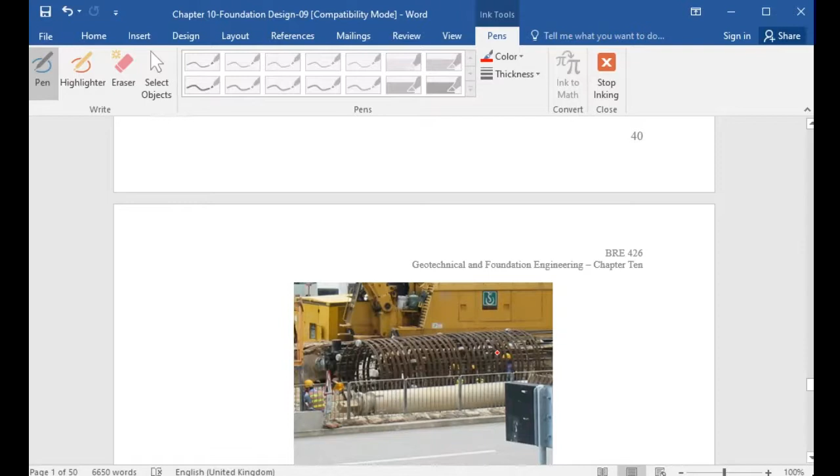With that, during the concrete placement, the steel pipe or the temporary casing will be extracted slowly until the whole steel casing is removed, and then the hole will be completely filled with the concrete, the reinforced concrete. So that is the bore pile construction using the temporary casing.

But what about the other technique? The slurry trench method, the slurry support method. Well, in the slurry trench, we will use the grabber or the clamshell.

We have this - there should be a... this, you can use this method, right? The clamshell.

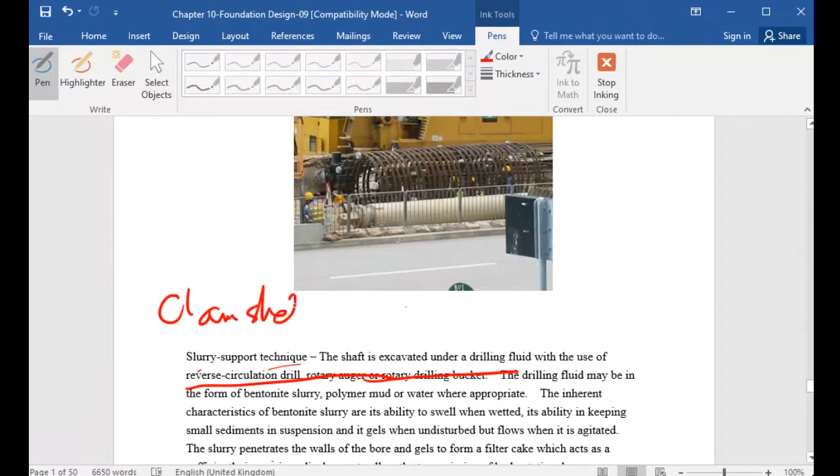Okay, the clamshell, which is in fact a very heavy machine, like the crab, the seafood, like the crab. This clamshell will open the jaws, grab the soil, and then by raising the clamshell, you have the soil excavated from the bottom of the hole.

Now, in the meantime, during the excavation, you have to use the drilling mud, sometimes called the bentonite. Bentonite. Now, the bentonite will be a slurry.

A specific soil material, which will give you what we call the thixotropic properties. In other words, if the fluid is allowed to stay a while, there will be a setting of this fluid, becoming a solid. And when being agitated, it behaves like a liquid.

So that will give you a very good support - support to the trench during excavation, support to the wall, so the wall will become stable. And the bentonite will use the fluid pressure to support against the penetration of groundwater.

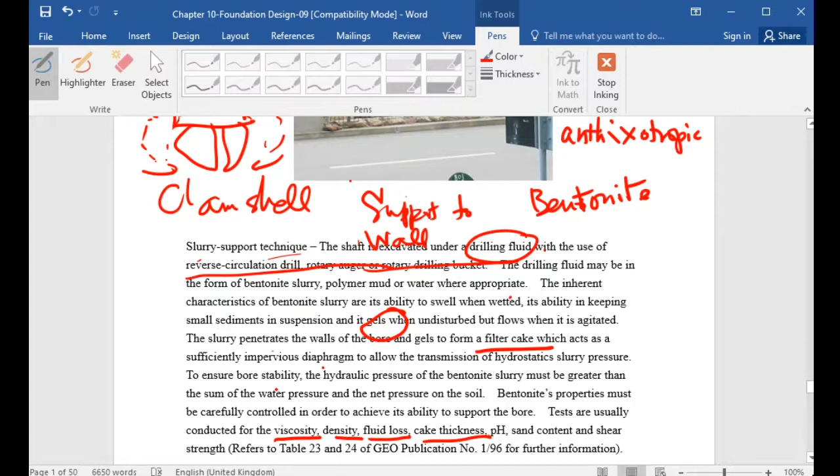Okay, now at the base of the bore pile, sometimes we want an enlargement. What's an enlargement? The bell-out, sometimes called bell-out, just like a bell.

Sitting on the table, there's a bell-out structure. Now the increased base area will give you the higher bearing capacity, because you have the larger base area rather than just the diameter of the bore pile. So you have to make the

enlarged base, so that you have larger base area to reduce the bearing pressure on the rocks - that's the bearing pressure - so that you have a higher rock bearing capacity because of this increased or enlarged base area.

Now sometimes it's called underreaming. Underreaming. So you can see it here - you can see the teeth here, the teeth. Now when the hole is reached down there, this will be extended out, this teeth - this length of teeth will be extended.

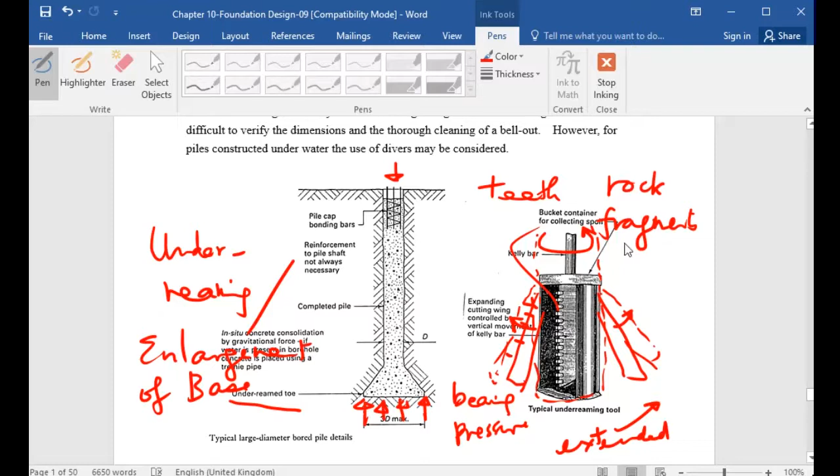Now you have so many rock fragments. Because of this enlargement, you have rotating your device against the hard rock, so that it will be broken into smaller pieces, the fragments. After that, you have come up with this shape.

Now, before the concreting, or lowering of your reinforcement cage, you have to make sure the base here must be very clean and clear from any debris. There should be no black debris, no smaller parts or fragments there. So you have to clean by what?

RCD, right? Reverse circulation drill plus what? Airlifting. When there is the RCD device installed, there will be a pipe, and the compressed air will be released at the base of that pipe, so that the compressed air bubbles will go up to the surface.

All this air bubble will rise up together with the debris, so that it's pumped out, and you got a sedimentation tank where all these rock fragments will settle down. So when you continue the airlifting until the surface, it gives you a very clean surface there. By inspecting the quality of the water sample extracted, the first sample will give you a lot of fragments. After several hours of airlifting, you should come to see clear water, free from any debris. That means the whole base has been cleaned with this airlifting operation.

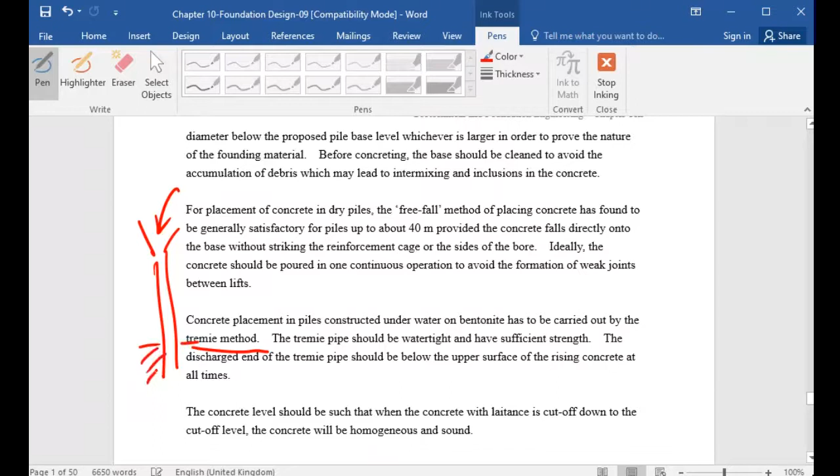And the concrete placement will be carried out by the tremie method. You know what's tremie, right? You use a down pipe, you place the concrete into it until the concrete is going down, and then it comes out from the bottom of the tremie pipe, so that you have to maintain a minimum embedment.

Embedment, in other words, you have to make sure the concrete outside the tremie pipe will have a certain depth of penetration. So the concrete will flow out from the bottom of the tremie pipe, and you have maintained this minimum depth of embedment.

Now, this will give you the newly placed concrete to push the previous pour upwards, so that when you continue the concreting, the concrete surface level will rise up until it totally displaces all the bentonite from the hole, and now we are left with the very wet concrete mix.

Now, in the tremie concreting method, you don't need any vibration or compaction, because the concrete will have very good flowing properties. This kind of concrete is sometimes called self-compacting concrete. In other words, by its own weight, the concrete could be compacted very well.

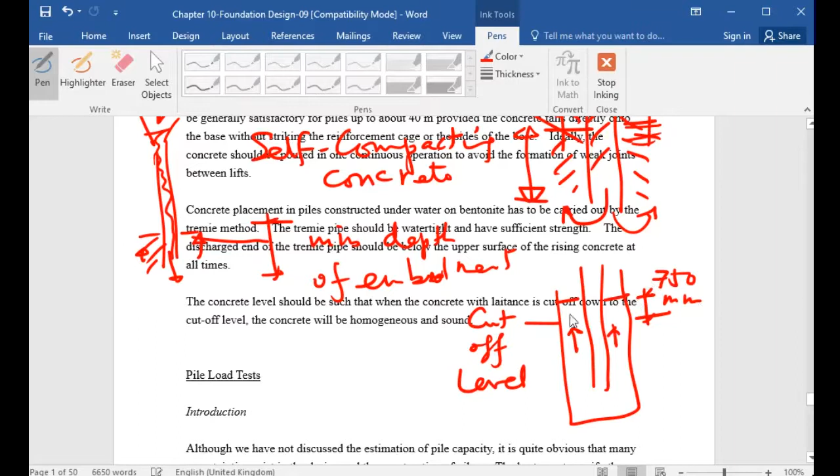Now you allow an additional 750 millimeters of concrete coming up to this level, and then you remove that part, because this concrete is usually contaminated with bentonite. So that's why we have to remove this additional 750 millimeter concrete.

So remember that you should pour your concrete a further 750 millimeters above the cut-off level, and this poor quality concrete has to be removed, should be hacked off. So until you come to this cut-off level, that should be giving you a very good quality concrete, but not for this 750.

So any question about the slurry supported bore pile construction? I think you have come across this knowledge in your construction technology or material course, some sort like that. Is it true? You have learned about it before, right?

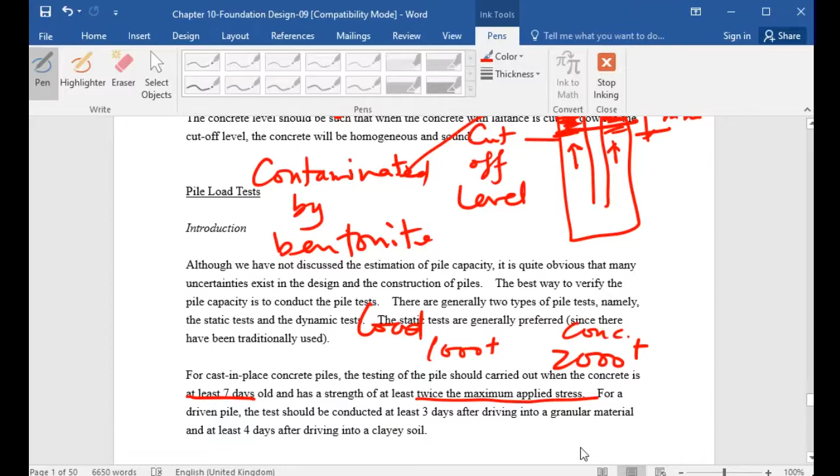Now for clayey soil, say for the friction pile, when the pile has been driven, you have to wait at least 4 days so that the settlement of the driven pile becomes stable, because if the pile is still moving, you should not apply the loading test. This is particularly important for clay soil because the settlement takes time, so you have to allow at least 4 days for the settlement to become finalized.

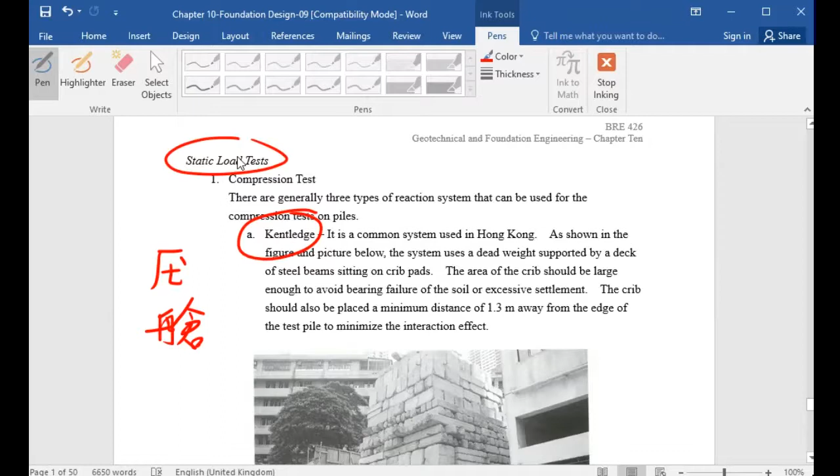Now, usually we do what we call the kentledge. This means a heavy weight - you are piling up things, like concrete blocks, so it becomes a huge load sitting on top of the pile. So it's a static test, a static load test, a dead load test. As you can see from this photo, you can imagine that's a kentledge.

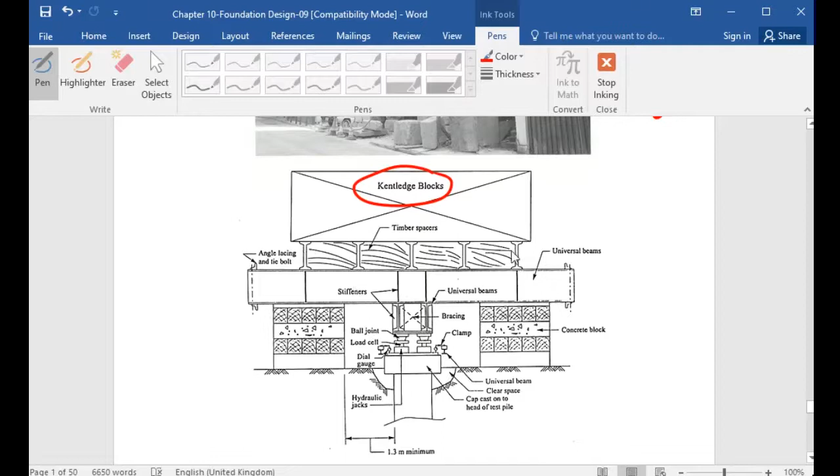A pile, a stacking of things, of concrete blocks. Now you can see the arrangement here. Here is the kentledge blocks, so that is the heavy weight, and then you have the steel I-beam.

So you have the steel beams perpendicular to this page, and in the 90-degree direction you have this horizontal layer. So you have a grillage of I-beams here, and here is the horizontal one. Both are horizontal, but in orthogonal direction - they are perpendicular to each other.

Now the horizontal one will eventually support the kentledge load through these 5 steel I-beams, and this loading will be carried by these rows of horizontal beams. Now, these 2 I-beams will apply the loading to this pile.

Now we measure the load cell. The load cell means a hydraulic jack - when you increase the oil pressure, it will move up. When you are increasing the hydraulic oil pressure, you have a greater vertical load, because it's going to try to move upwards, so it will support the kentledge, the upper concrete blocks.

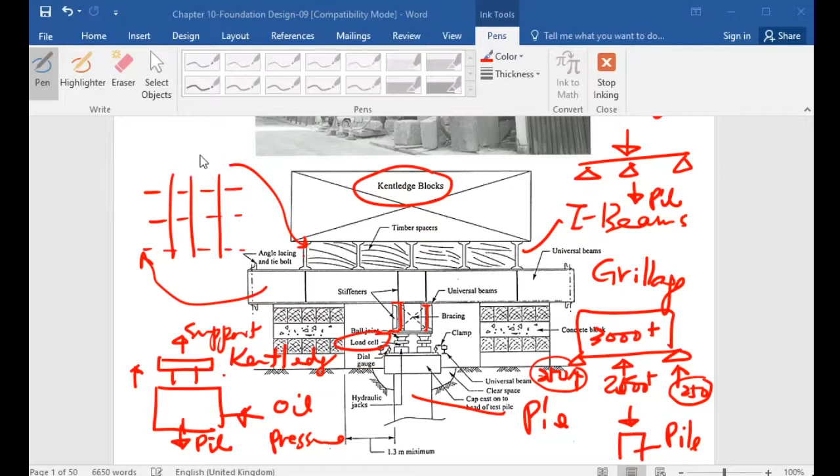So can you imagine and understand what I have explained to you? What's the kentledge loading test? Yes or no? Do you understand this kentledge or pile loading test? Good, okay.

Now for this arrangement, it's somewhat different. This is not using the kentledge loading principle. Instead, this is the pile test, the pile test arrangement for this pile to be tested. On the 2 sides of the test pile, you have driven 2 anchors, the left anchor and the right anchor.

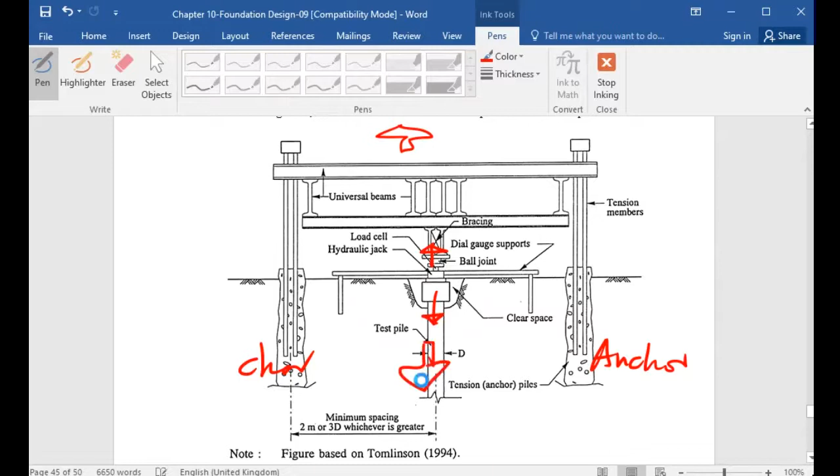When you are jacking at this position, you are trying to lift this horizontal beam upwards, while at the same time adding a load onto the test pile. Under this uplifting force, that's the frame. When there's a force trying to lift the frame upwards, at the same time there will be an anchoring force. So F is equal to reaction 1 plus reaction 2. In other words, F equals R1 plus R2.

That F is the force applied to the test pile. If you want a larger F, that means you have a larger R1 and R2. In other words, you should drive a long anchor pile on the 2 sides of this test pile.

You don't need to put up with any kentledge load here, you are not doing the kentledge loading test. Of course the drawback, the disadvantage of this pile loading with what we call the reaction pile, is that you have to install these 2 piles. This is additional cost, at your own expense, because they are installed just for the purpose of doing the pile loading test. So it's a wastage of investment for this pile loading test arrangement. That's not common in Hong Kong, installing anchor piles just for the purpose of doing the pile loading test.

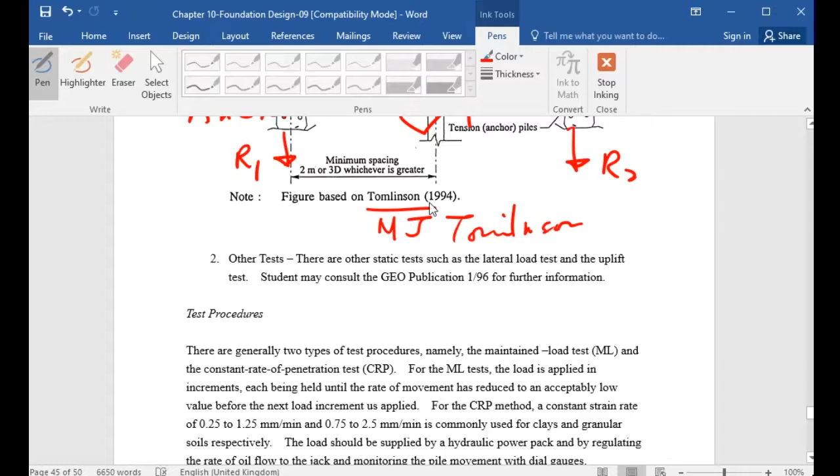Now the test procedure. For the test procedure, say for a pile, if the design load is 2,000 tons, then often we will test the pile 2 times, in other words 4,000 tons, to see whether the pile could be tested to receive double the design load. So 2 times the working load or design load.

Now we often apply what we call the ML test, maintain loading test. Say for 4,000 tons, you come up with say 3 or 4 stages: 0, then 1/4 of it, 25%, 50%, and then 100%. So we increase the load from 0 up to 1,000 tons, then 2,000 tons, then 4,000 tons.

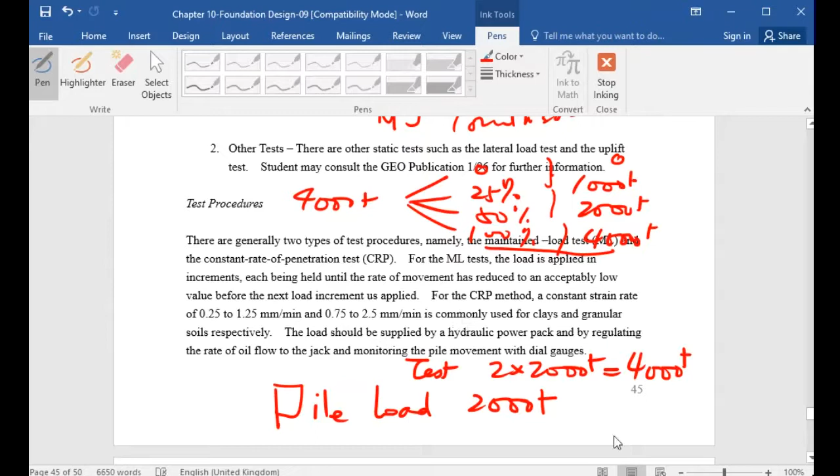Or you should check: there's an initial settlement at a very fast rate until the settlement rate slows down to a certain degree, and then with the slowing down of the settlement, you can proceed with the second loading stage. So it's important to apply the maintain loading test properly.

Until the rate of movement has reached an acceptable low value, you should maintain the load. So the settlement has slowed down before you add the second load increment. That is called the ML test, maintain loading test. You should not add the loading too fast. You should allow time for the pile to settle to a certain degree, until it slows down, before you complete the second stage. That is the principle of the pile loading test procedure. You should allow time for the load to be maintained for a certain period until the settlement of the pile has come down.

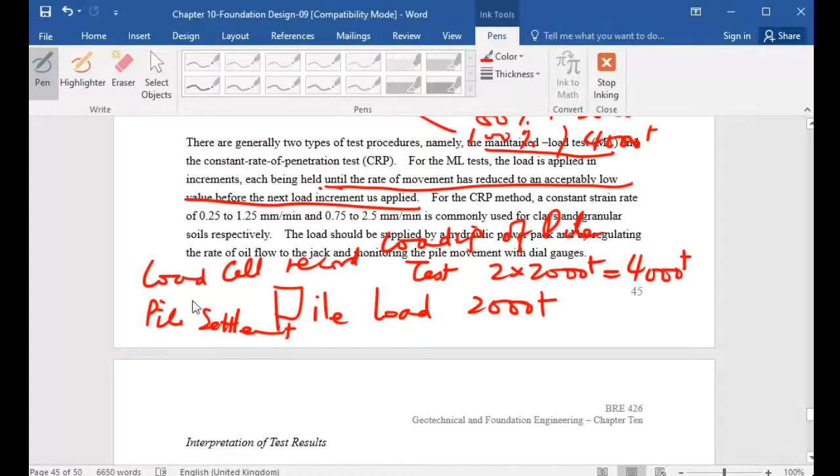Now you can see from the kentledge loading arrangement, you can see the dial gauge here. This dial gauge measures how far the top of the pile will go down. So it's important to monitor the settlement of the pile as it is being loaded.

Throughout the whole testing period, you have to make sure you have a true record of the loading and also the corresponding settlement of the piles.

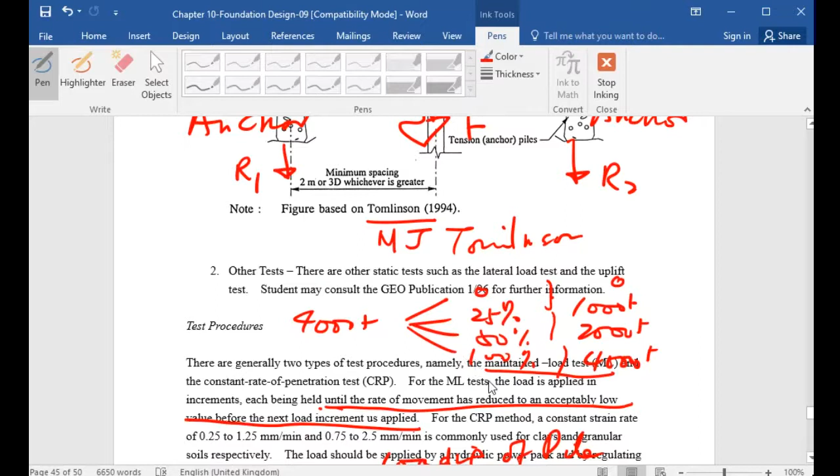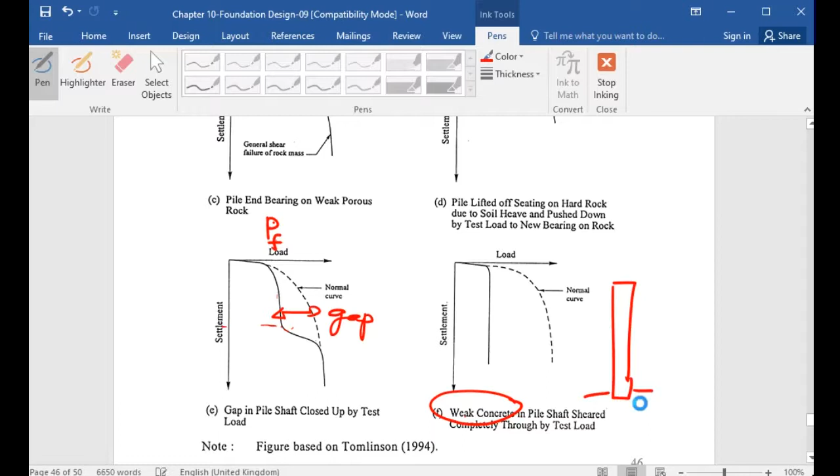In other words, for these piles, despite there being very good soil here, good soil or good rock, but you apply the loading, the concrete is too weak. The concrete pile fails first, before the bearing failure of the rock underneath.

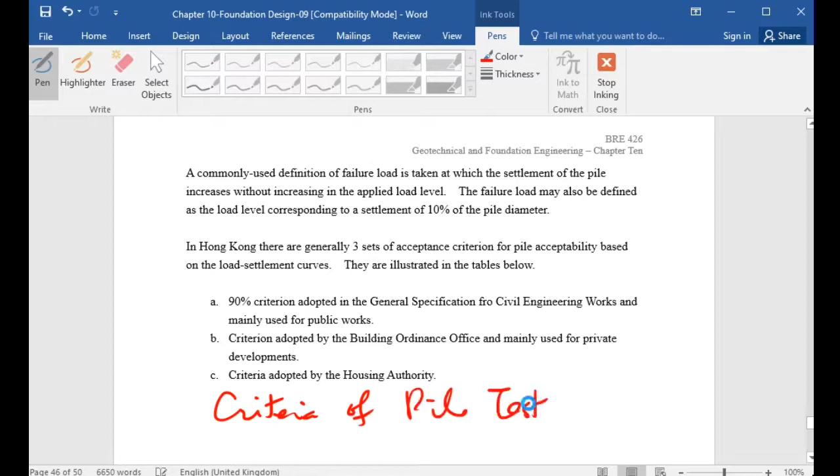Now let's talk about the criteria of pile test acceptance. How does a pile get accepted after testing? Now, let me tell you about the very famous 90% criteria, according to the civil engineering works specification. Now suppose you've got that is the load, and that's the settlement.

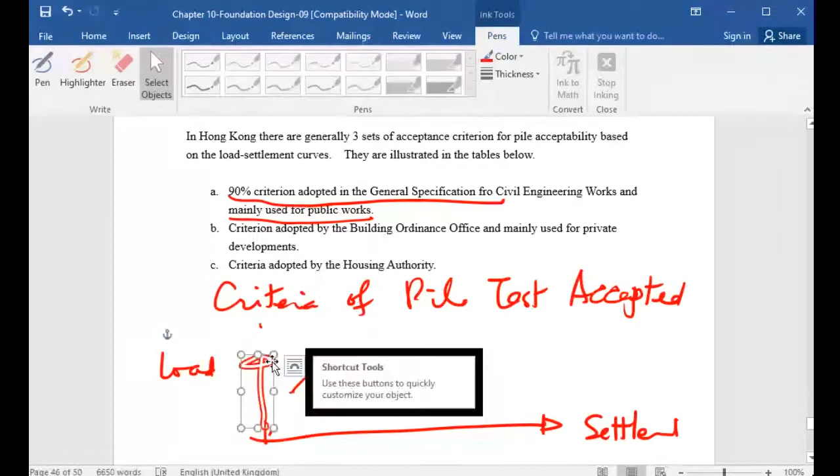Okay, now when you apply the loading, the loading increases onto the pile, then you have a larger pile settlement. Very straightforward. Now, until then, okay.

Okay, now that's the load, that's the settlement. The settlement of the pile. Now, for a certain loading, say here, imagine that's the P. When you come to 90% of the value of the P, then you mark the settlement, 0.9 P. So at 90% of the failure load, that is the settlement.

Now you double it, so that is 2 delta at 0.9 P, right? Now if the pile, when you increase 10% more, and you have got your settlement equal to 2 times the settlement at 90% of failure load, then this pile is acceptable. It's okay.

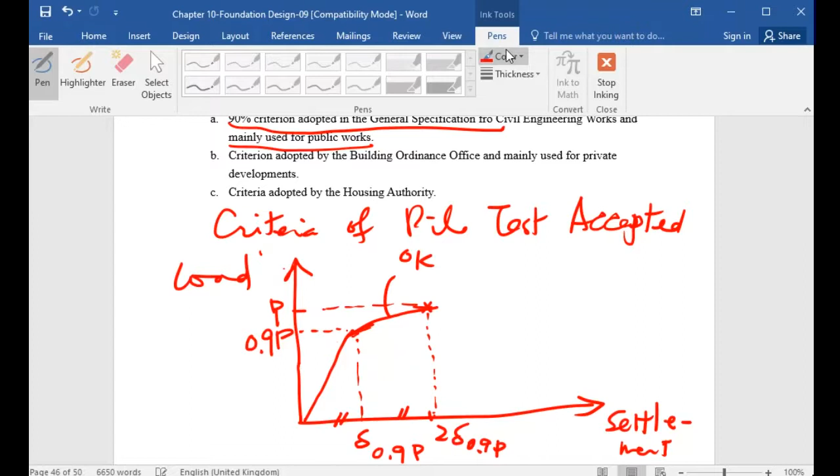What about here? If a pile, say here, but you have a larger settlement, so this is greater than 2 times the settlement at 90% of failure load, now this pile cannot be accepted. Because at 10% more, the pile settles much more than 2 times of the settlement at 90% of the failure load. So this one is good, but that one's bad.

What about for the pile, say here, you got this pile. So when you increase the loading from 0.9 P, you have that settlement, it's smaller. The settlement at the failure load is smaller than 2 times that. Say if that is 10 mm, and you got only 17 mm, so good, right? That's okay, good. But what about for this part?

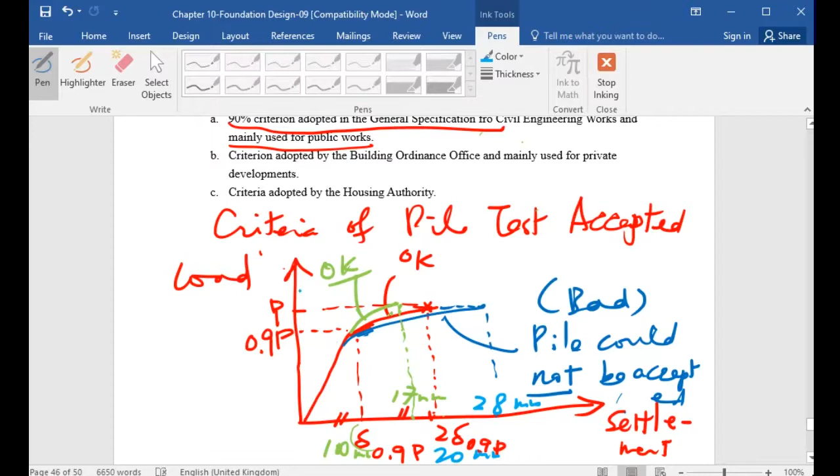Now that is what we call the first 90% criteria. So for the loading, when increased from 0.9 P to the test load, if the deflection goes beyond double the deflection at 90% of the test load, that part could not be accepted. But if the settlement is less than 2 times the 0.9 of the test load, then the pile is passed under this loading test.

Now there are other criteria, not only for civil engineering works, but also required by the BD and also the housing authority, HA. Of course, the BD will have control over the private project, private building. But for HA, that's the public housing. And criteria A is for the infrastructure, the civil engineering project. So basically there are 3 different criteria, adopted by the 3 important sectors of the local construction industry, for civil engineering works, for private building, and also for public housing.

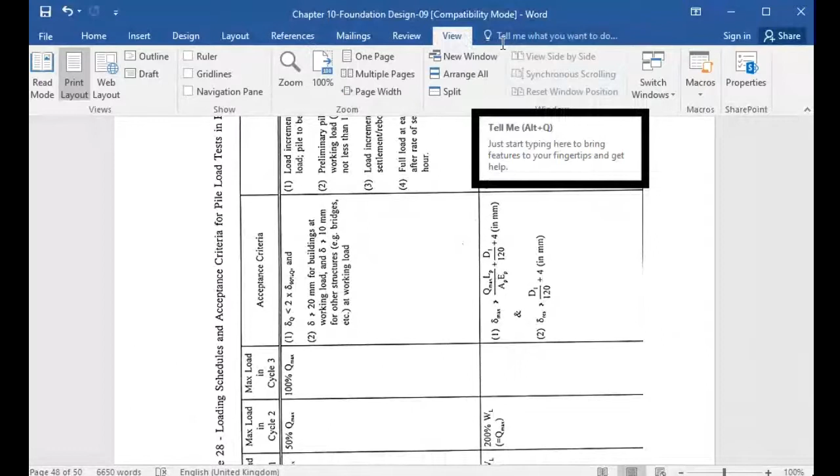Can I rotate? How can I rotate? Okay, now you can see here, 2 times, 2 times the 0.9 or 90% of the test load.

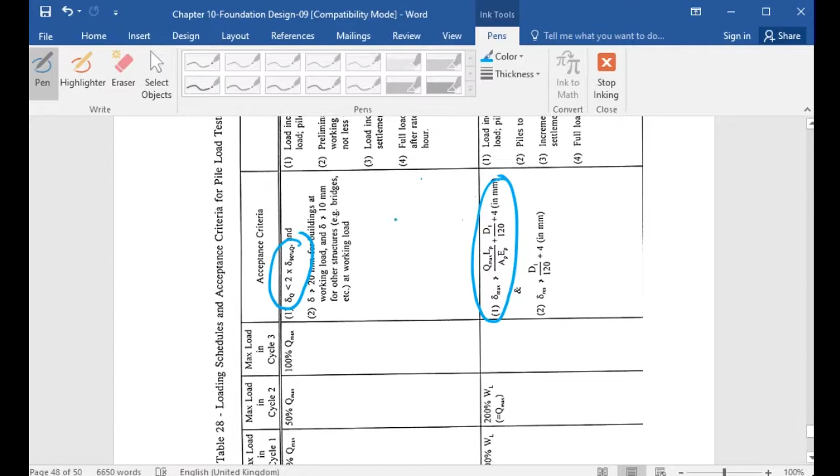Now for the private development, say for the Buildings Department, the deflection or the settlement of the pile will be working according to this formula. The QL, that is first of all the elastic part, elastic settlement, and then you come up with the second part. It depends on the diameter of piles, the diameter over 120 plus 4 millimeters. So the deflection should not be greater than the sum of these three portions.

The housing department adopts a similar formula to the BD. Now of course, we don't want to look into the details of this acceptance criteria. Basically, the maximum deflection consists of two parts. The first part is the elastic one, remember Hooke's law, FL over AE, that's the elastic part. And then the second part is something related to the diameter of the piles, with a certain percentage, 1/30 times the diameter of the piles.

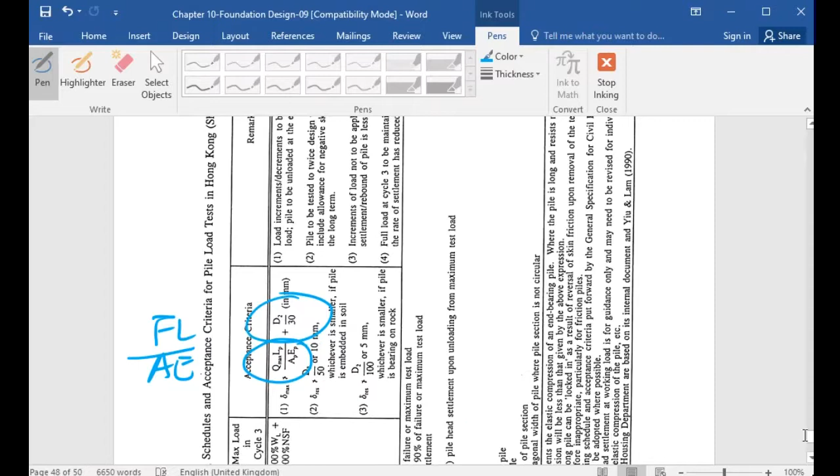Now, I think we'll stop here for our pile foundation. Okay, MJ Tomlinson, very famous guy. Okay, I have completed chapter 10. Are there any questions for chapter 10? No question?

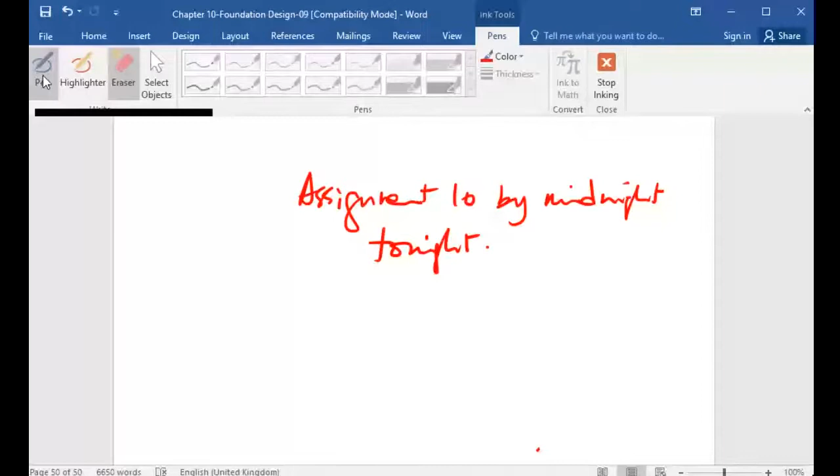Now I will do some revision work for the rest of this lecture and tutorial tonight. So are you ready to do the revision? Yes or no? Now I will tell you, I have got something from the subject leader of this course: the past exam paper solution, exam paper answers.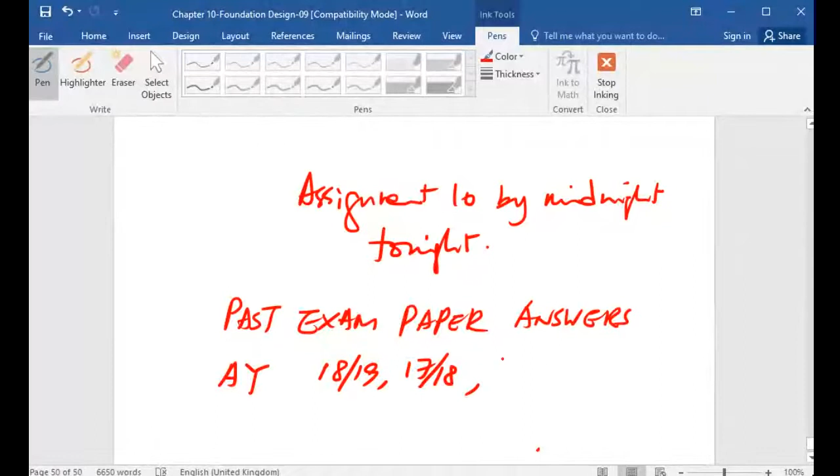Well, I got them for a few years, right? 18, 19, and then 17, 18 academic years, right? And then, okay.

So, Mr. Lam, right? You haven't got assignment 5 and 9, okay? But I think I have sent all the assignment 5 marks. Did you submit assignment 5 late, or did you submit it in time or late? I don't know, I can't remember. If you submitted your assignment in time, you should receive my mark just like the rest of you, in the same batch, right? Okay.

Now I will have the numerical answers. I have the numerical answers. So if you have tried your best to do the past exam papers, I've got those numerical answers for you to check. But before I give you the numerical answer, you should show me the work you have done, right? Otherwise, I will not give you the numerical answer. So that is the practice here.

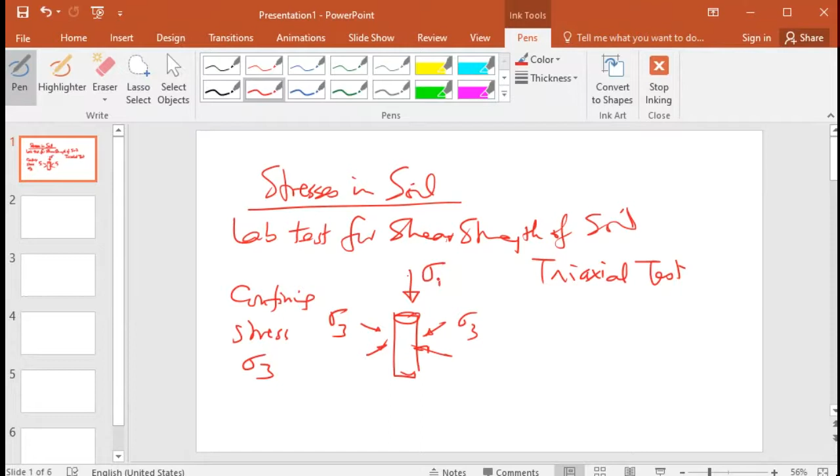Now, in the triaxial test, there is a soil sample. First of all, you apply what we call sigma 3, the confining stress. The confining stress, sigma 3, and so on. And then you apply a principal stress, sigma 1.

Now, before we apply sigma 1, initially, in three directions, you have the confining stress. Confining means the stress all around, whether X, Y, or Z axis. And then this confining stress will be kept constant. So there will be no further increase of the confining stress.

And then we apply an increment, sigma 1 minus sigma 3, so that will give you sigma 1. Sigma 1 minus sigma 3 plus sigma 3. So on top of the confining stress, you add this additional stress, that is called the deviator stress. Deviator stress, because it's different from the confining stress.

Because in the confining stress, X, Y, and Z are all the same, except for this vertical stress, you have to deal with by adding an extra stress on top of the confining stress. So the extra stress plus the confining stress gives you sigma 1. That's how the name comes from - the deviator stress.

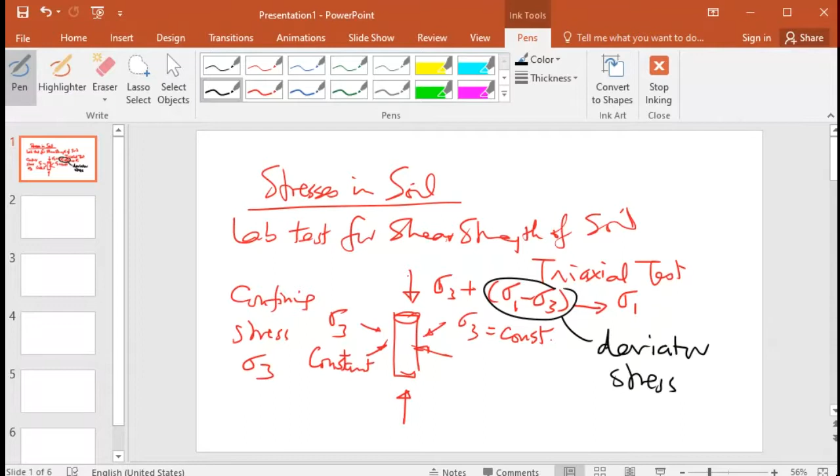Okay, having those concepts, then we come to this. Say you got the deviator stress. Remember, sigma 1 minus sigma 3, and confining stress here, say in MPa. So that's sigma 3. Say here you are given that is 200 MPa, and you got 150, and then you got 250. The confining stress, say, is 200, and so on.

So when you are going to plot the stress-strain graph, you have to work out the sigma 1 first. What's the sigma 1 in MPa? Very easy - the deviator stress plus confining stress gives you sigma 1. So sigma 1 minus sigma 3 plus sigma 3 gives you sigma 1. So 350, and then 450, and so on.

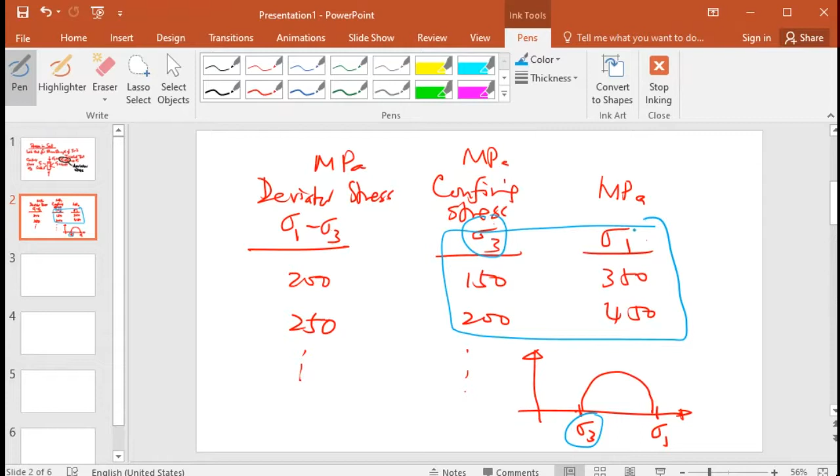So you're going to plot that. How are you going to plot it? You know that's sigma 3 and that's sigma 1. So you get what - a Mohr circle. So here, when you take that is sigma 3, here you got the sigma 3, and that is sigma 1 here. So you got sigma 3 and sigma 1. You can draw the Mohr circle. Is that true?

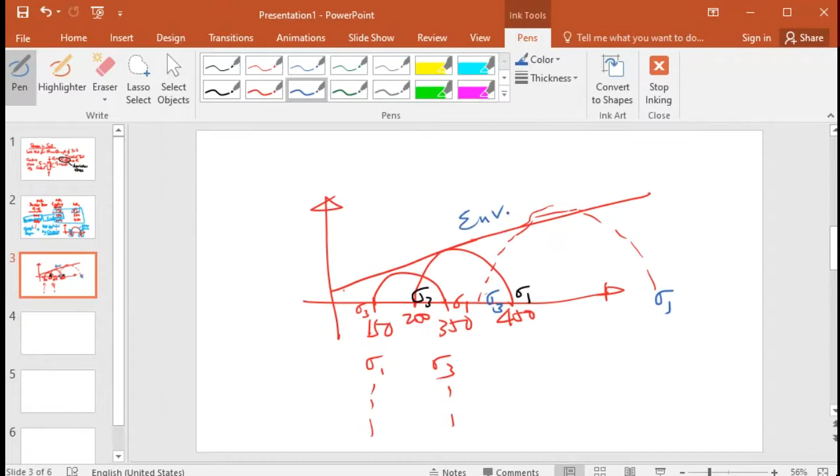Okay, now try to draw the base straight line which touches the Mohr circle. That is called the envelope. Right? That is the Mohr Coulomb envelope, the failure envelope.

Because at any point here, that is the shear strength. The soil will fail by shearing. Shear strength of soil, S shear. That's the normal stress, sigma, here, normal stress.

Okay, so what's the equation here? S is equal to C plus sigma tangent phi, right? What's tangent phi? Here's the cohesion, C is the cohesion. And what's phi? Here's the phi, you have to use the protractor to measure the angle here.

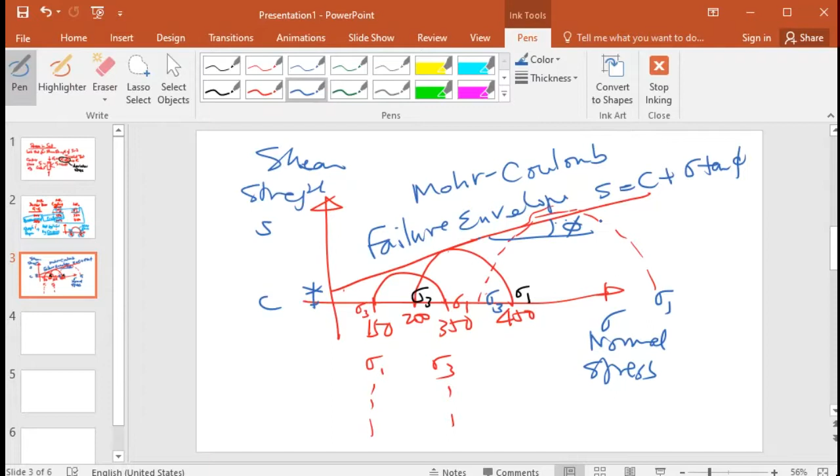So by drawing the straight line touching all these 3 or 4 or more Mohr circles, you lay down the Mohr Coulomb failure envelope straight line. Then you can get the cohesion, C is the cohesion. Okay, that's your result. And here, the angle of internal friction.

Yes or no? Okay or no? Okay or KO?

Now, what about after this soil lab test? You have a slope. Now, if you know the vertical stress here, say 400, or what about 200? The sigma V equal to 200 MPa.

And what about if the lateral earth pressure coefficient is 0.3? So what's the normal stress here? Could anyone tell me what is the horizontal stress here, if we know that the lateral earth pressure coefficient is 0.3 and the vertical stress is 200 MPa?

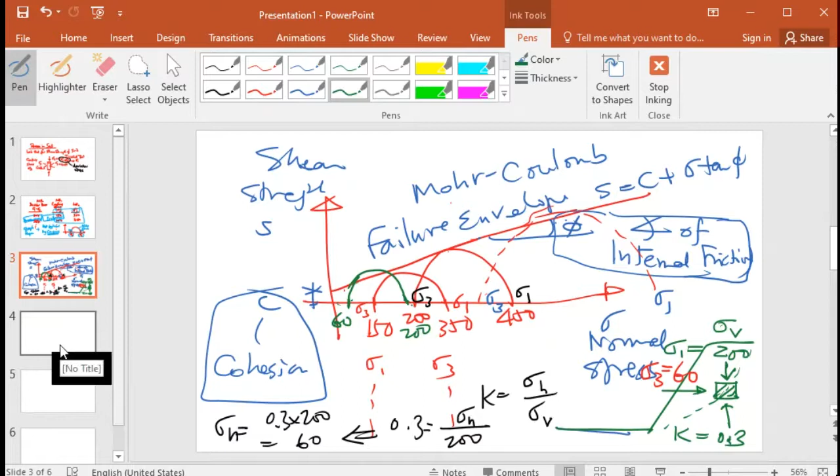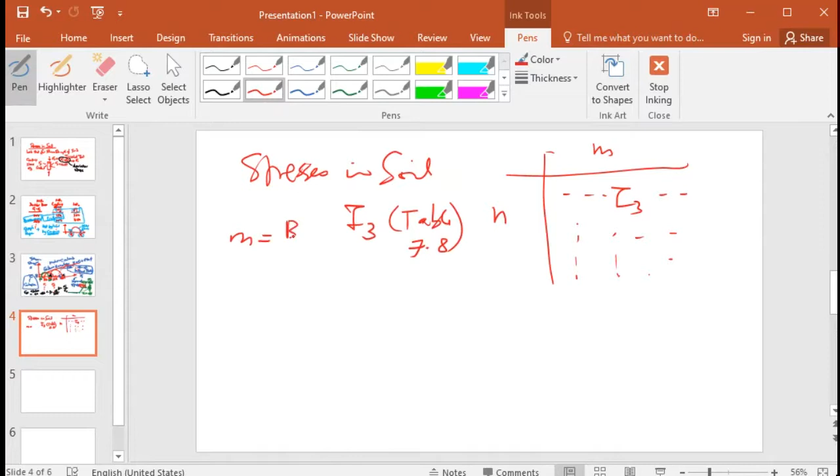Now I think you recall there's a table with different values of m and n, and that is what we call I3, the table 7.8. So you have different values of I3, so many. What's m? M is b over z, and n is equal to L over z. What is b? On the plan view, you got the footing, so you got b and L, and z is the depth.

In other words, you got the loading area here, BL, and then you got what?

See here, right? The Z. What's the stress here? Okay, sigma Z, right? What's the stress due to the loading here? You've got the footing area, and you have a loading uniform distributed over this area.

So you have to work out what's the M. Well, M is B over Z. Say if B is 4 meters, and that's 3 meters, and if Z is 2 meters, so M equals to what? B, say 4 over 2, and 3 over 2. So you got what? Here 2, this 1.5. So you look up here.

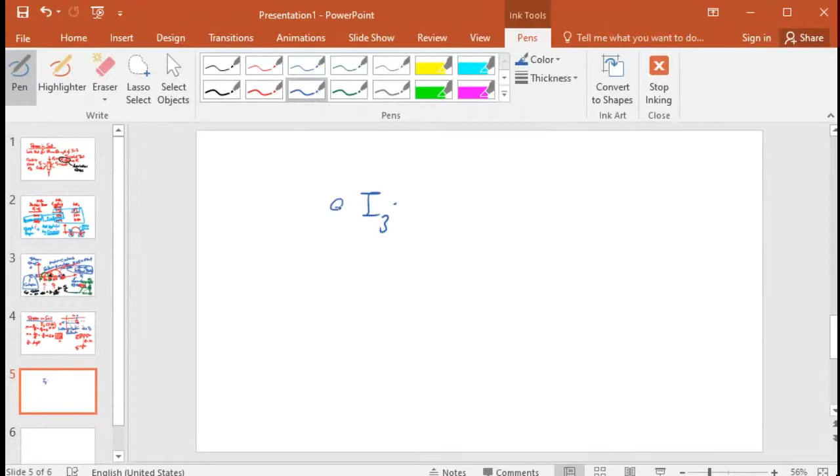You work out the values of m, n, and also the z. So you have applied that, and once you got the I3, then you should multiply by the load, that is the loading on the footing. Okay, so that gives you the sigma Z.

Okay, now we come to this part. Of course, this equation refers to the Q, and that is the I3, for this, and you got the M and N, so that you can work out, say, for the point A.

So the stresses at depth Z below A is given by what? The Q times I3. And what's I3? Well, it depends on the B and L, and you work out M equals to B over Z, and N equal to L over Z.

Now it's easy for the calculation for the stress below point A, because it's related directly to that table, showing the different values of the I3. But what about if we want to calculate here, for the point here?

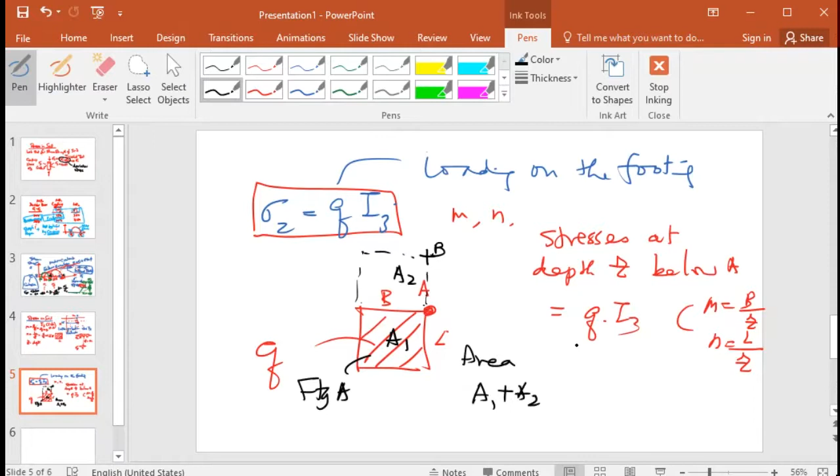Now, I don't want to calculate the stress at point A. I want to know what's at point B. Well, it's very easy. You should consider the area by considering the loading is fully covering the big rectangle. So if that is the footing A, that's A1 and A2.

So A1 plus A2, so you got the I3, say 0.05. And then, because actually you do not have the whole loading area here, you have to deduct, minus A2, so you have to remove the loading for A2. So again, for A1, A2, you should use the values of m and n for the whole area.

So you got this B and L. What about for A2? A2 is this area. So let's take some example. Now let me use some examples.

So that is 4 meters, and that's 4 meters, and that's 2 meters, 2 meters. Now for M, and we want to know for Z. Z is equal to, say, 2 meters. So M is equal to what?

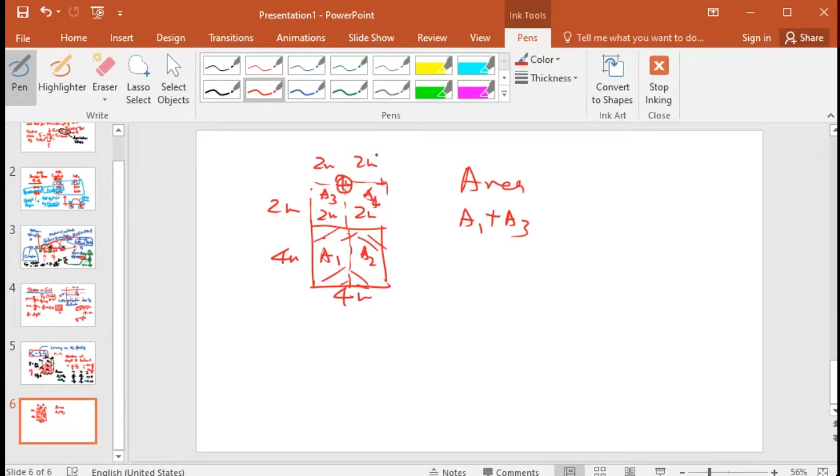Now we are talking about this point. So area A1 plus A3. So if that is again 2 meters, that's 2 meters, that is 2 meters, that's 2 meters, 2 meters. So area A1 plus A3.

So what's M? Is that equal to 3? So what's M? M is equal to what? Now this A1 plus A3 is a big rectangle, so B is equal to 6, and N, that is 2, 2 over 3. You got the I3 here. And then you have to minus A3. So what's A3? 2, 2, so 2, 2, and the depth is 3, 3, and you got, say, a certain value.

And that's minus, okay, because that is minus. Now we have treated this part. What about for the other part? Exactly the same, A2 plus A4. So A4, right? That's A4. And minus A4, right?

So again, similarly, plus minus, right? So you add up all this. So you can see here, A3 minus A3 plus A4 minus A4. So eventually you got A1 plus A2. Now that is what we are looking for, because we want to know what's the stress at this point due to A1 and A2. So you add up all these things, right?

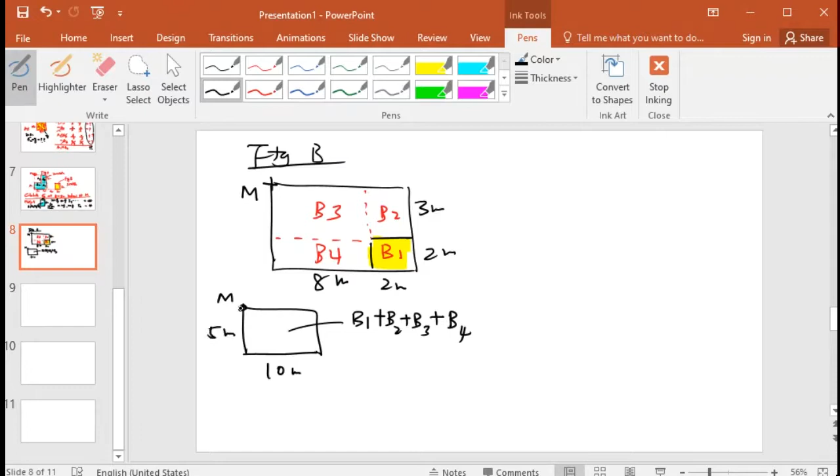So for the big piece, that's 10 meters, and that's M. Okay, and that is B1 plus B2 plus B3 plus B4, right? Okay, now assume that's the total, the whole rectangle. So that's 5 meters. So you have worked out M, N. What's M? 5 over 3, 10 over 3, right? So you got the I3.

Okay. Now you have to deduct this piece, right? This piece, B3 and B4. Okay, so B3, B4. Okay, so what's the B3 here? 8 meters. And what is there here? 5 meters.

So you have to deduct B3, B4, right? So B3, B4, so 5 meters times what, 8 meters. So 5 over 3, 8 over 3, right? So you got minus, right? So that is plus something. That's minus, minus B3, B4.

And then what about this piece, right? B2, B3, and then again, so can I go up to here? Okay. B2, B4. So B2, B3, right? So it's this part, this part.

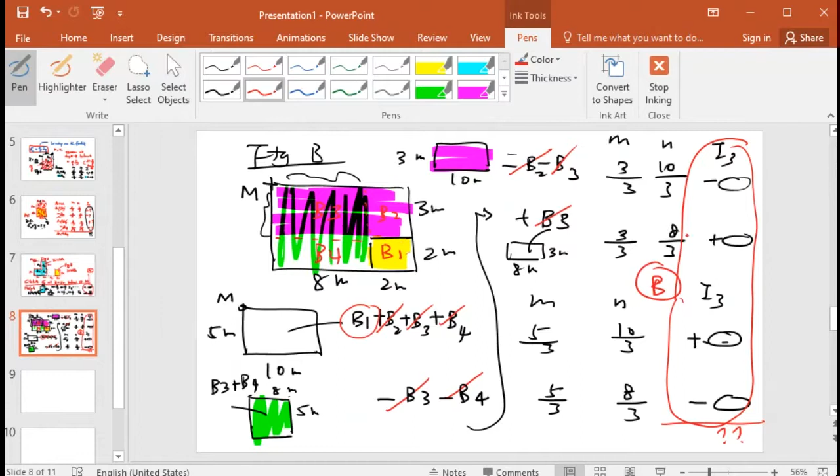That's due to the footing B, right? So you add all these influence factors, right? B and all these A. So 200 footing A, 200 times A plus 300 times B, right? Will give you the final one, right?

The stress at M. That's due to the footing A, right? I3 calculation, right? I3 calculation. That is for the footing B. Okay? Is that okay? Is that clear to you?

Remember that for any footing, it's too easy, right, to work out any points within here, and also for the point here, right? But for this point, it's particularly difficult. Any point falling in this area, say here, right? Say here, any point here.

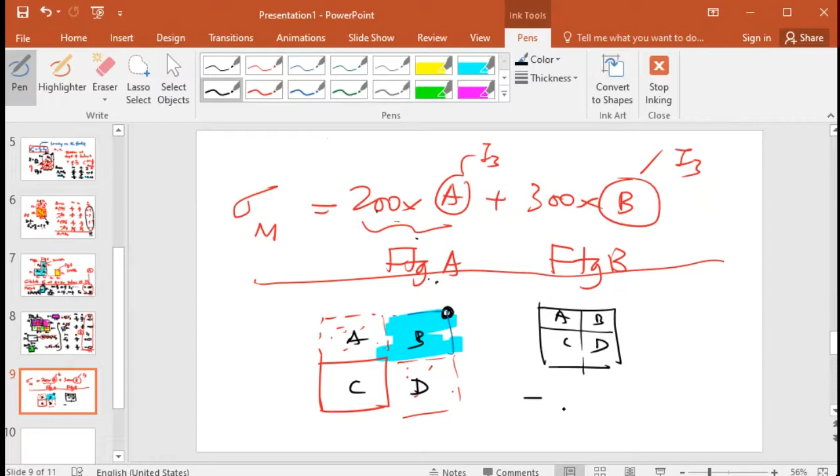Right? You have what? Say A, B, C, D, right? So you have to work out the whole what? B, C, D, right? And then minus, right? Here, A, B, right? And then also you minus what? B, D, right? Sorry. You minus...

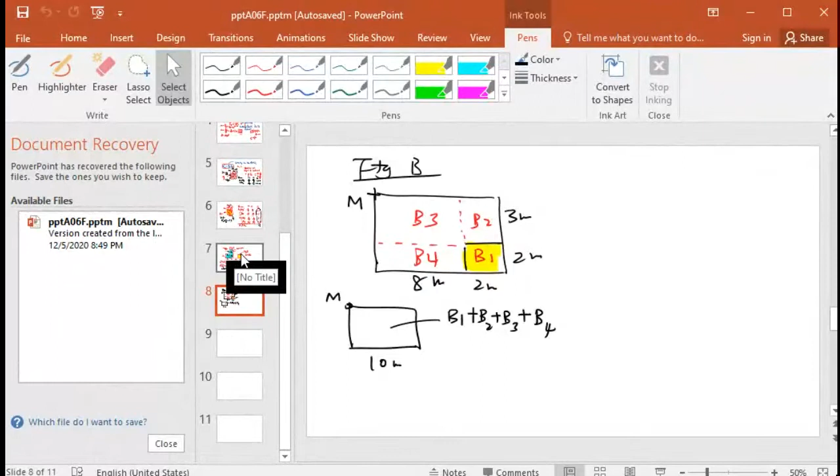Okay. Now, let me recap here, right?

It's easy, right, to work out any point here, right, for the stress here, say, and at any point here, right? It's very easy. And also for any point within this area, it's very easy, right, to work out the stress. Say for this point, you just divide it into two parts, right? So the total area minus this area, total area here minus this, right?

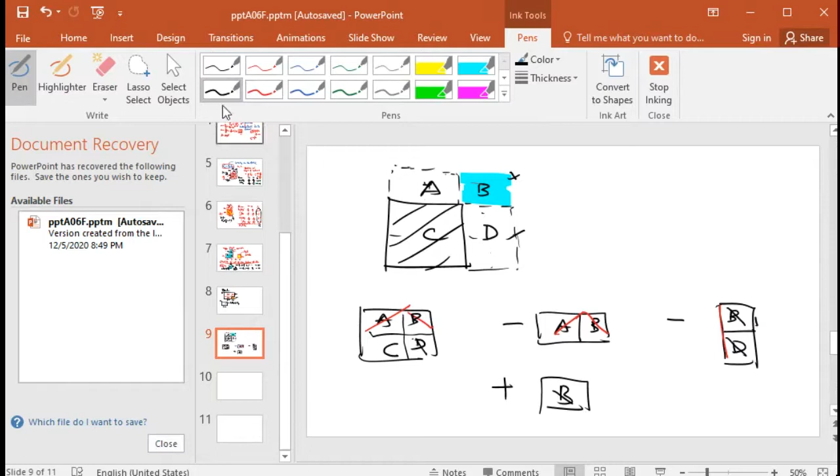Okay. So for this piece, corner piece, you have to pay special attention. This one. Is that okay? So that's the trick, right? For any corner piece, you have to bear in mind that you will be double counted for any piece, right? For that corner piece, so you have to add once more. That will give you the right and correct answer. Okay?

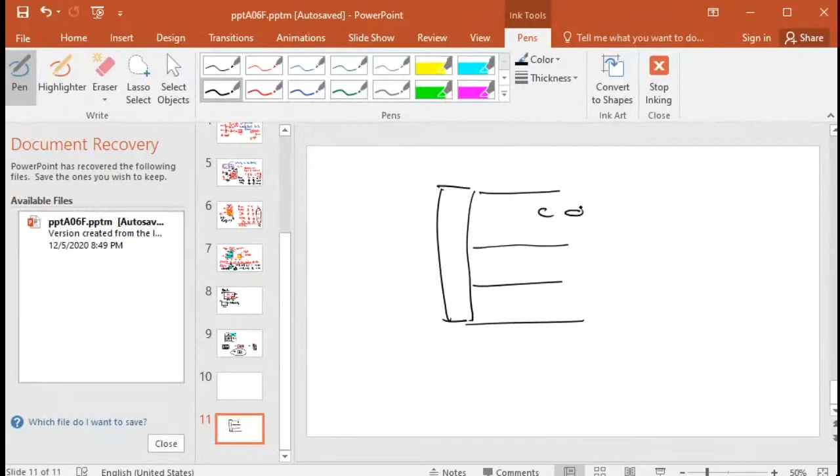Now here, if there's a retaining wall, and you have 2 or 3 layers of soil, that is C, phi, and gamma. C1, phi 1, gamma 1. C2, phi 2, gamma 2, right? C3, phi 3, gamma 3, right?

Now, if there's a surcharge, depending on whether you are going to calculate Ka or Kp, right? For active pressure, what's Ka? You have to use this formula: the horizontal pressure is equal to Ka sigma V, right? For active.

Minus, square root Ka, sorry, 2C square root Ka, right? Remember minus 2C. What about for the passive? If that is active, if that is passive, equal to Kp sigma V plus 2C square root Kp. Now what's Ka? Ka is equal to 1 minus sine phi over 1 plus sine phi, right? And Kp, the other way around.

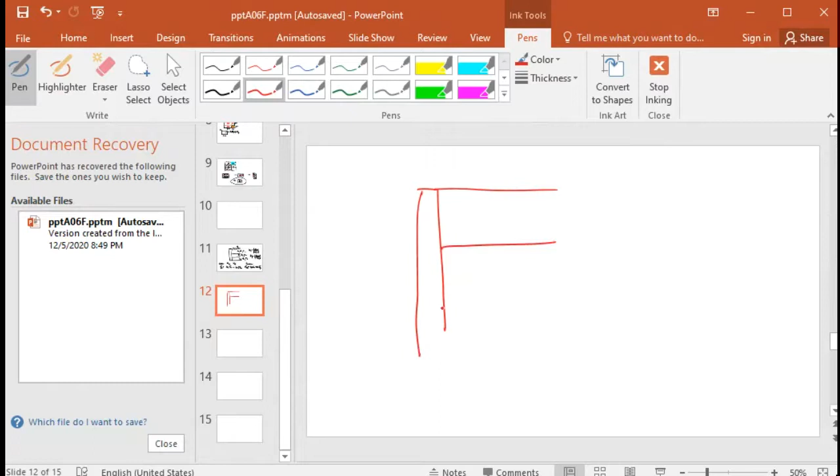Please take a look here. Now, suppose for this retaining wall, tell me if there's say 3 meters, and the groundwater table is here, say here. Groundwater table here. Okay, and that is 4 meters, and that is 5 meters, right?

And if there's a surcharge, here C equal to say 2 kPa, C1, gamma 1 say 16 kN per cubic meter, phi 1, 20 degrees, phi 2, 30 degrees, and C2 equal to 0, and gamma 2, 17 kN per cubic meter, and phi 3 say 35 degrees, and C3 equals 3 kPa, and gamma 3 equals 18 kN per cubic meter.

Now, can you work out the vertical stress here? We want to calculate the stress for any point within this layer, because we want to work out the stress diagram. So tell me, for point A here, what's the vertical stress, sigma A?

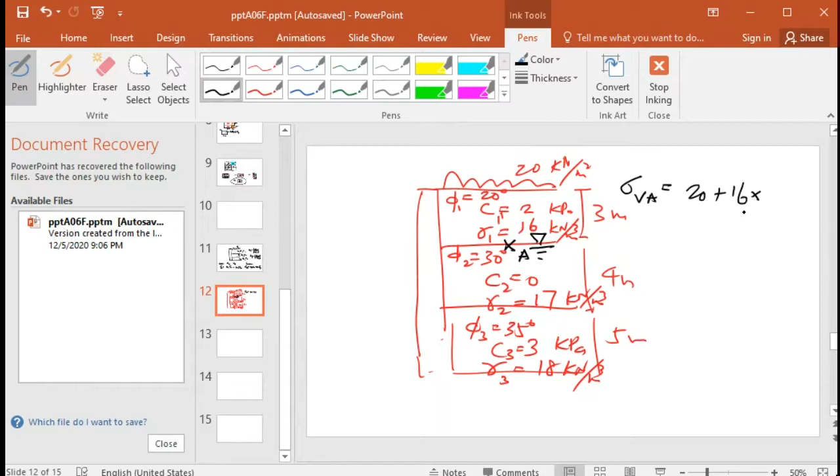Now if say there's 20 kPa, what's the vertical stress here? The vertical stress is 20, the surcharge, plus 16 times 3, because it's 3 meters deep. So 20 plus 16 times 3 meters. Yes or no?

Yes, okay. What about for B? Sigma VB equals to what? If that gives you 48, so that's 68. You directly use 68 to continue adding. Because here is 68, and then you have a further 4 meters, but please note it's below groundwater, so you have 17 minus 9.81 times 4. Is that correct? You have to deduct the pore water pressure from the unit weight of the soil, yes or no?

Okay, now once you got sigma VA, you have to work out the horizontal stress. Now suppose that is the active state. So what's the horizontal stress at A? Now you've got two paths. For the point above that, and for the point below point A, it's totally different, because you have different strength parameters. You have two different values for the cohesion and also the friction angle.

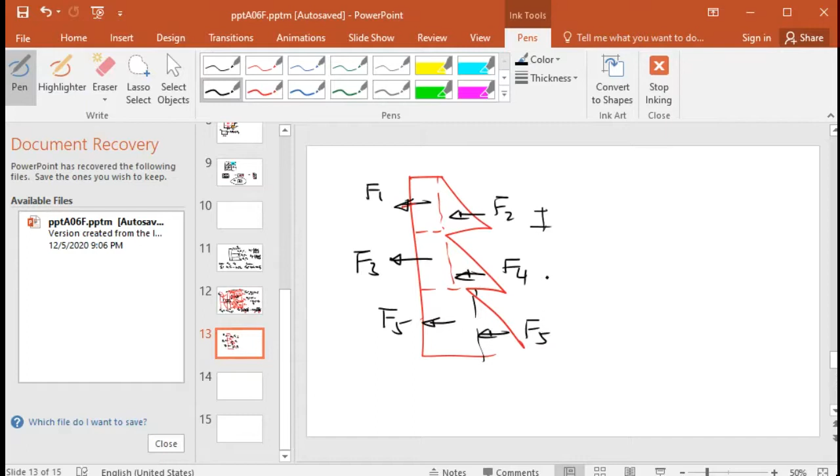So you got this pressure diagram, right? Then you can divide it into what? Say that's F1, that's F2, that's F3, F4. You have a series of rectangles and triangles, right? So you know that's 1/3 of the height, that's 1/3 of the height, right? So you can add up F1, F2 up to F5, F6, right?

F6 is total active thrust, right? And then you work out what's the location for this, the total force, the thrust T, right? So what's the total thrust T? It's equal to F1 up to F6, the summation of F1, F2 up to F6. And what about the location of this resultant force?

How do you work out the L? Well, very easy, right? Summation Fi Hi over total Fi. So you take the moment about the base. Take moment about the base. So you got F1 times H1, F2 times H2, F3 times H3, and so on, right?

You get the centroid of the rectangles and also the triangles, right? And then you work out the moment, equal to the force times the elevation, of the base or about the bottom of the wall. Okay, so you got this L. That's the answer.

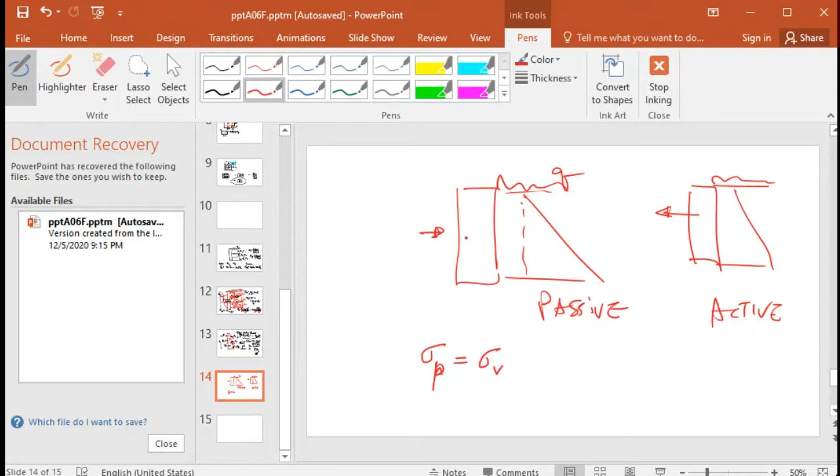So sigma h is equal to sigma v times Kp plus 2c square root Kp, right? And for the active case, sigma v times Ka minus 2c square root Ka. Of course, Kp is equal to 1 plus sine phi over 1 minus sine phi. And Ka is equal to 1 minus sine phi over 1 plus sine phi.

Now, tell me what's the vertical pressure here? It's equal to what? Q plus gamma h, if gamma is the unit weight of soil. So you got this point, sigma P, and that is the sigma A.

Now remember this surcharge. If you have the surcharge, you have to add not only the gamma h, but also the surcharge. Okay or not okay?

So you develop this diagram. So that is the KPQ here, because you have the zero depth here. That's the KAQ for this point. And you got the sigma P, and that's the sigma A.

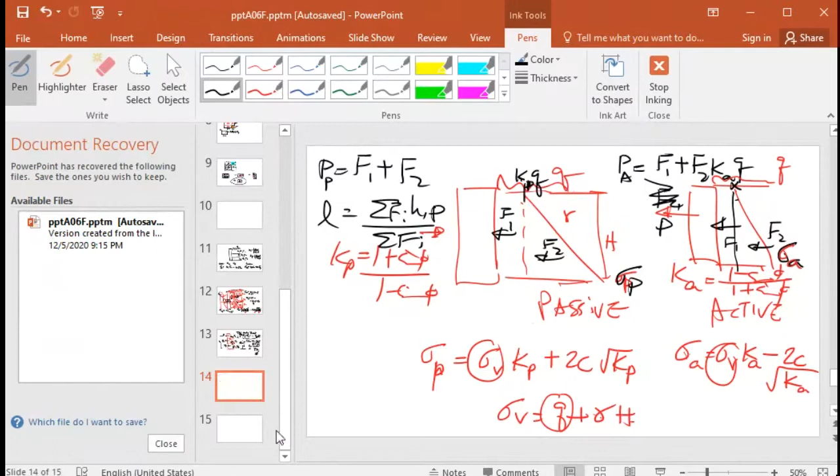Let me turn to the active, the lateral earth pressure. Now I will do a new sharing of the application first. Now, can you see the value for the example 8.1 for the chapter 8.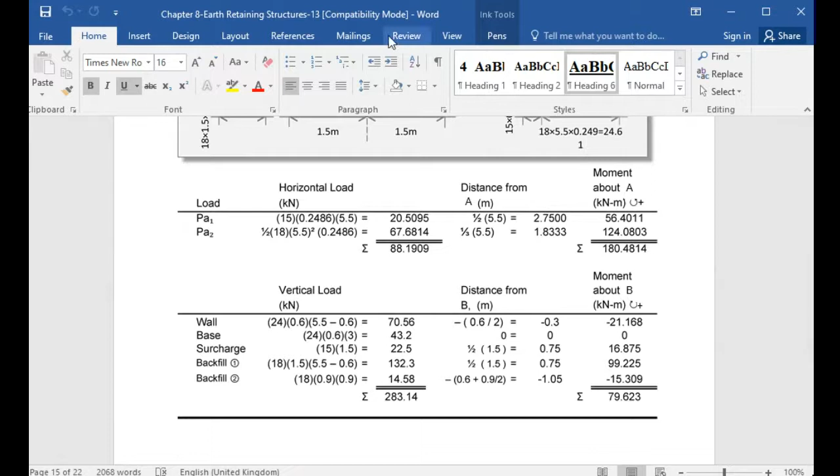First of all, you have to work out all the forces, and then you can see here, you take the moment about the toe, A is about the toe. Here the moment about the toe. Now he also does a calculation for a moment about the middle point B, so that you come up with this moment. So in other words, the writer here does the moment calculation 2 times. First of all, to work out a factor of safety against overturning, he must do the moment calculation about the point A.

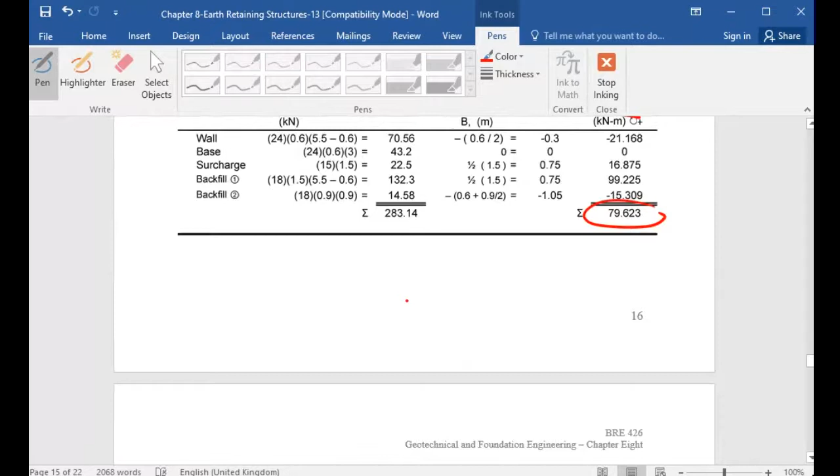And then in order to calculate the bearing pressure, the soil bearing pressure, because here, he had to do the moment calculation here. So that's why he has to do the second moment calculation. But in fact, you can do it only once.

It's already good enough. Now let me tell you about that. Now here's the base. You know, that's the B, that's the A, right? That's the toe. And that is the midway, the midpoint. Okay? Now, can you see that once you got this, you can obtain this value in a much quicker way. Now, I will tell you.

Now, first of all, you take the moment about A, so that is MA, right? And then you come up with MB, right? And then you have a vertical load. Vertical load is the summation of this, right? That is the summation VI.

Now, you don't need to work out this MB. Actually, you should ask, how can I get this? Well, you can see here. Now, if you want to get the MB, can you change this?

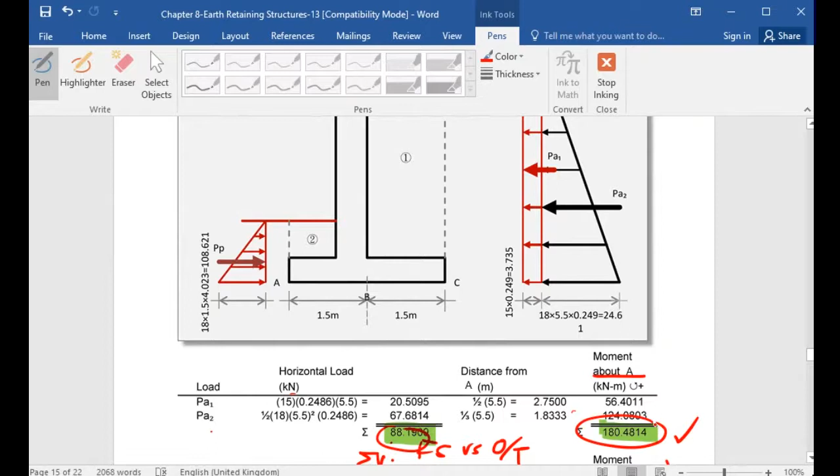Okay, that's the moment about A. Now what is the 504? That is the restoring moment. So that is the overturning moment about the toe A, that is positive. What's negative? That's the restoring moment about toe A.

Okay, so that is the summation of VI times B over 2. Now, in effect, you come up with 504 here, it's the restoring moment, okay, restoring moment about the toe.

So MB is equal to what? If you work out, it is equal to 100.86. So if you work out here, that's exactly equal to 100.86.

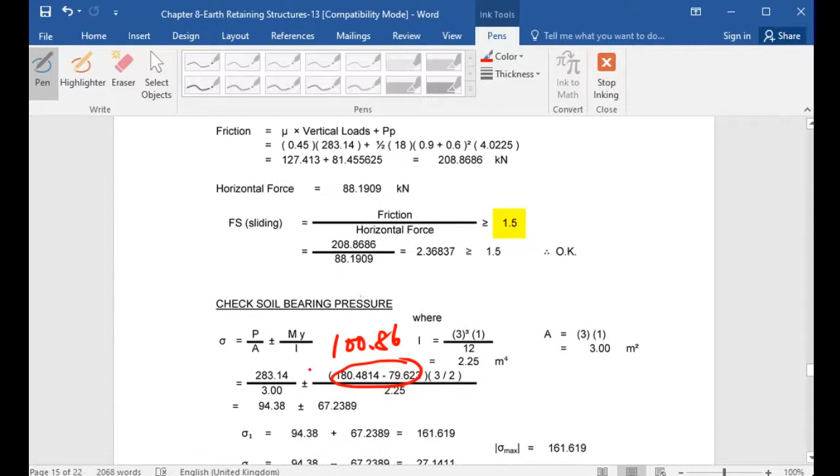So you see what I mean? You don't need to do this calculation again. What I'm saying is that you don't need to do this calculation, you just use these figures. You can see here, 180, 504, and then you got the M exactly.

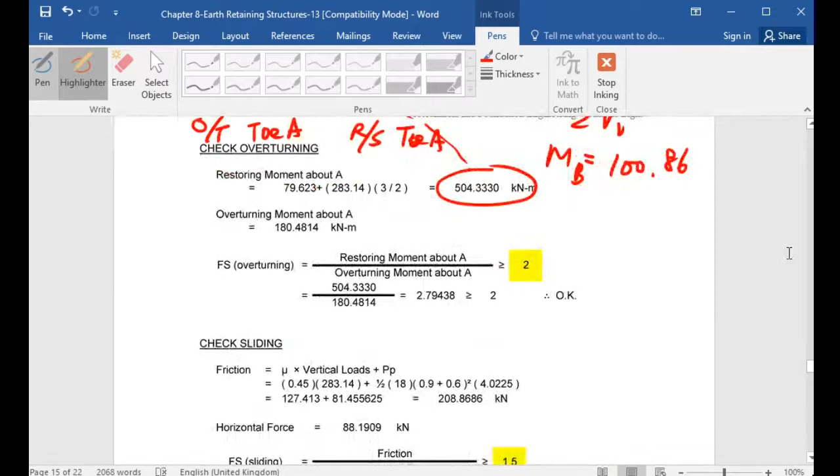Right, 100.86. You see what I mean? You can work out the 100.86 directly from the overturning moment calculation, so you save a lot of time. Why bother to do this calculation?

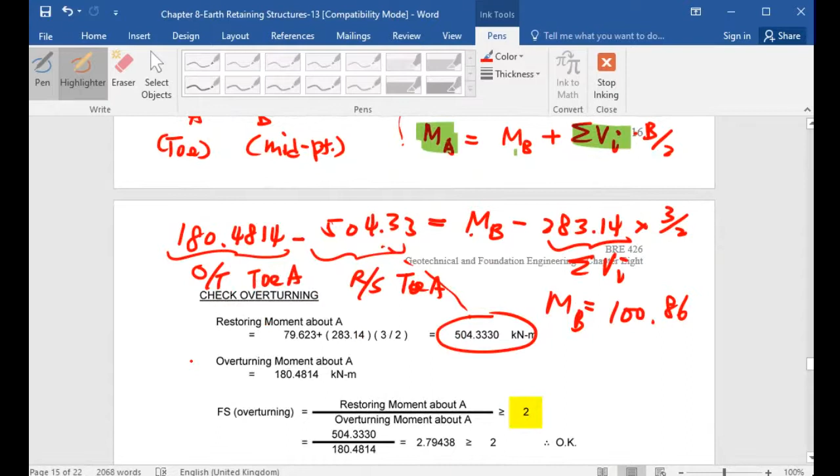You have to see here, right? Very stupid, you have to do the calculation here.

Because you have worked out the overturning moment, taking the moment calculation about the toe A, and also the restoring force about the toe, then why do we need to do the calculation by taking the moment about point B again, just for a separate point? Use this formula here, that's this formula.

Because you have come up with the MA, overturning minus the restoring moment, and you know the total vertical weight, and then you work out the MB, and the MB goes into your soil bearing pressure calculation.

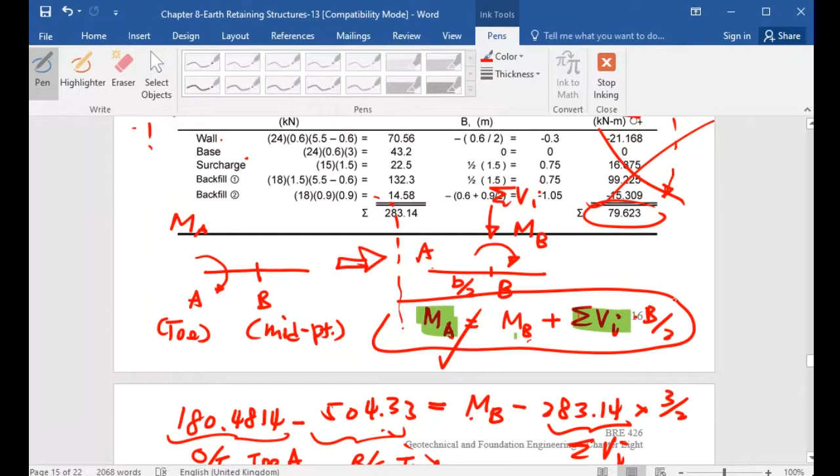Now, of course, if you are not familiar with this formula, you just ignore my teaching here and follow the calculation as shown in the teaching notes. What I'm saying is that there's a shortcut, not to take the moment calculation again at a separate point and at different points.

Now you can check with your assignment, it's true, that equation can be verified with your previous assignment calculation. You can try it if you have time. If you don't understand, well, you just ignore my teaching here and do your own way of calculation.